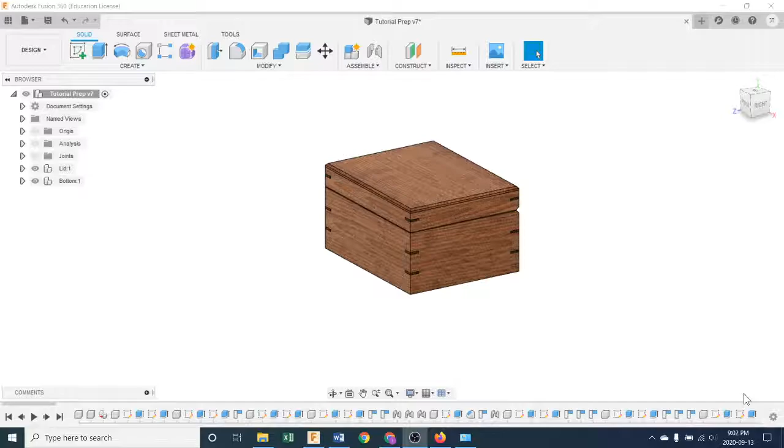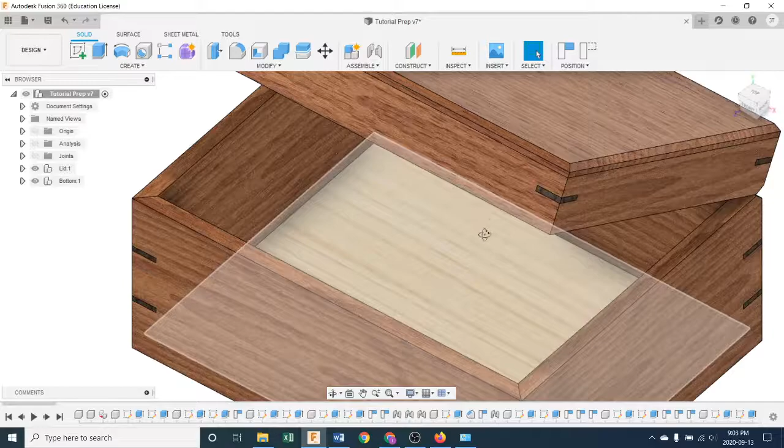What you see on the screen is hopefully the end result. This is the modeled box that I have, with the bottom, and these things called splines in the sides, which we'll talk about later. The box opens and closes, and you can see inside. Maybe you can start to see the power of being able to model something prior to building it. There's the hinges in there, that's what's making it go like this.

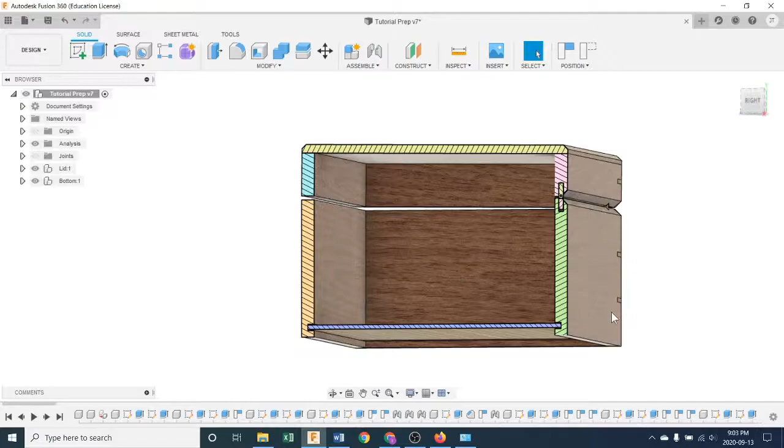If I really want to get some detail going, I can click on the analysis here, and I've got it set up so we can see inside, and we can see the hinge and how it fits into a hole. We can also see, as I zoom, this inset bottom. All these things making it pan and zoom, if you don't know how to do that, or how to orbit, you should be watching the basics video again, which precedes this one.

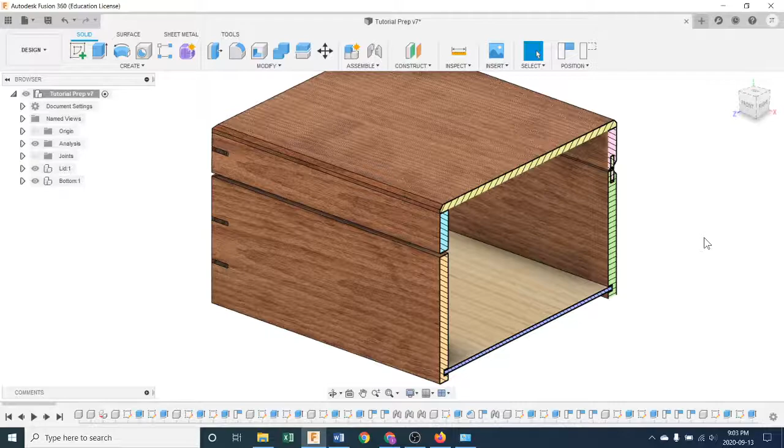Let's turn the analysis back off so we can go back to our box. To make this, and why is it called a mitered box, by the way? Well, it's all because of this joint. It's a 45-degree join, and when you join two pieces of wood at an angle, it's referred to as a miter. So we're making this mitered box.

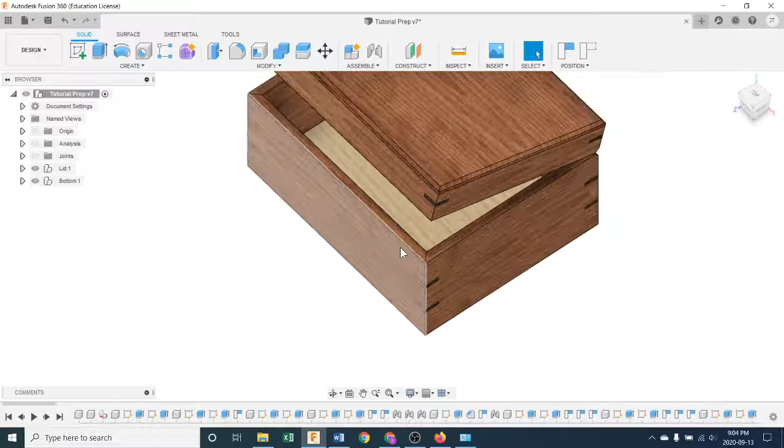So where does yours begin? Well, it begins with a lot less than this. We begin by heading up here and creating a new design. Right there, click New Design. The design is going to start you with this wonderful blank space that we're going to have to do some setup to get ready for our design.

So the first thing you want to do is save your project with a name. We'll go up here and hit save. I'm going to call this one the box, and I'm going to call it the box 2 because I just tried to record this video and I messed up, so here I am trying again. So I'm going to call mine the box 2.

Hit save. Oh, and by the way, I gave it a location, sorted out down here by this drop down arrow where you can create a new project. You might call it Woodwork 10, and then a new folder, you might call it mitered box, and then inside that folder you create all of your designs for your mitered box, which in this case is probably just going to be one design, but we'll see. We'll hit save.

Okay, notice what happened right away. The box up here changed to the box 2. That's my name for my design, and also over here it named it box 2. So you shouldn't have untitled anymore, or unnamed, or whatever it said. You should have a name for it, hopefully.

Next thing. In Fusion, we like to organize our work. It makes it easier to understand and a lot easier to work with. So part of that organization is recognizing something called components. Fusion uses components, and then you assemble those components into assemblies, join them, in various ways. So simple thing, our box has basically two components.

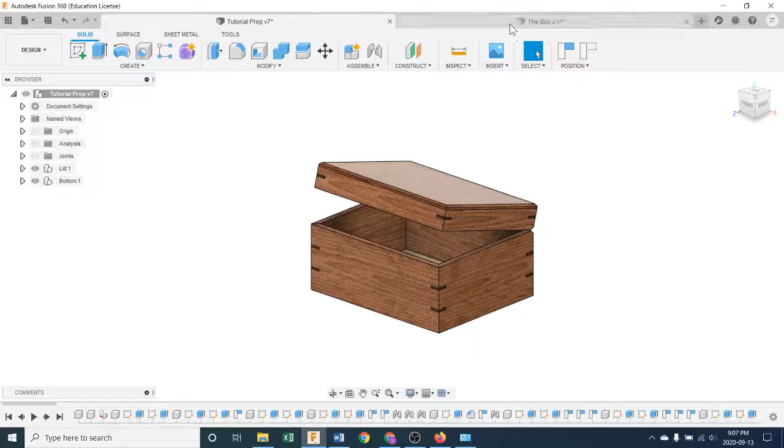Okay, so I'm going to set those up right away. I'm going to right click on the lid this time, and go New Component, and I'm going to call this one front. And believe it or not, I'm going to do it again - right click on the lid, new component, and this one is going to be called back. Name it. Back.

Then we're going to right click on the lid again, and we're going to create a new component, and we are going to call this right. And we are going to go right click on the lid again, new component, and we're going to call this left.

Okay, so we've got all these parts to our lid. I'm going to leave the top for now, but I'm just going to go front, back, right, left, and we're going to make all those pieces. This video is about the front and the back. We'll get to the right and left in a second. So how do we begin?

Well, if you notice at the end, when I hover over these things, there's these circles. That one is now on - it says activate component. This is critical. Activate component. Only one component can be active at a time. The component that's active is the one you want to draw. So I'm under the lid and I am drawing the front, so I'm going to make that one active. This is important to make sure that all of the drawing you do ends up associated with the right part of the box.

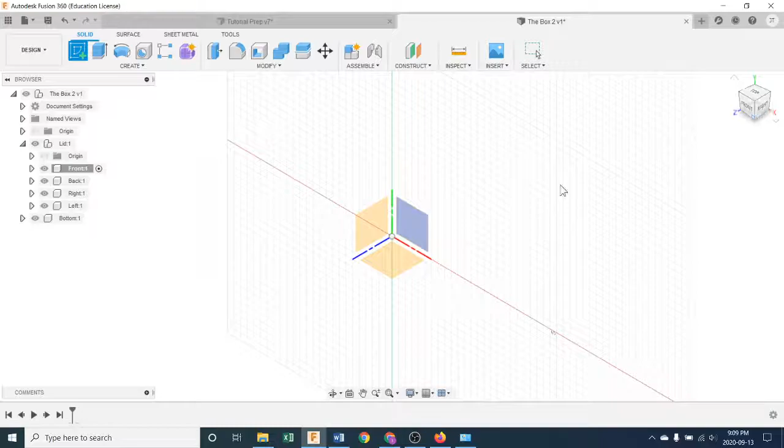First thing I want to do to draw something is head up to Create and pick Create a Sketch. Always do that. Now I'm presented with my origin. Because I'm drawing the front of the box, I'd like it to line up - remember, these two associate with each other. I'd like it to be on this panel so it lines up with front. When I click it, notice this turns to front, this view cube, and my crosshairs are straight on, and this is my origin. That's exactly what I want. If you've messed up, Control Z, back up, try again.

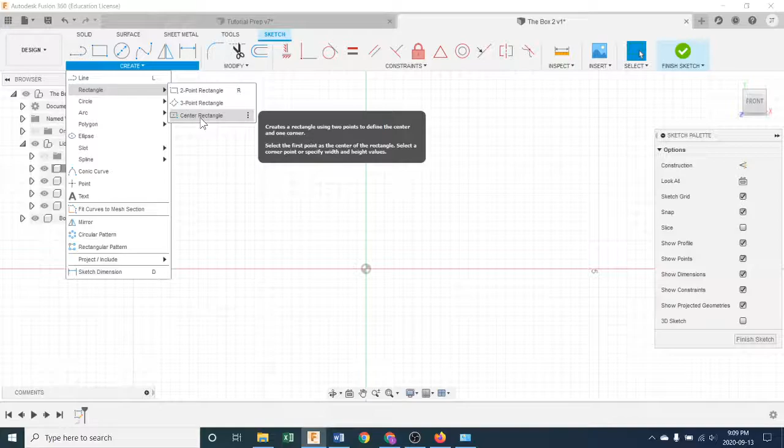Okay, head up to create, head to rectangle, head to center rectangle. There's different ways to draw everything - there's 3 choices for rectangle. Let's do center. Pick the origin center and draw it out. Don't click again, just draw it out.

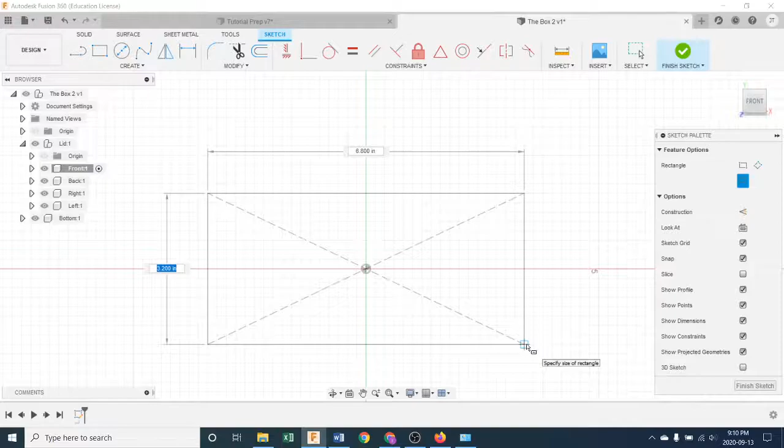Okay, this is where you get to choose the size of your box lid. So this is a custom choice, right? I mean, how big a box do I want? I don't know, so I think I'm going to make mine vertically 1.25 - see how it changed over there? Then I'll hit tab, and let's just say I screw up and I just hit enter right now. I don't want it to be 6.8 like it says, but I'll just hit enter. Boom. Oh, what do I do? Well, all I have to do is head up here to the one I don't like, double click on it, and it's editable again. So I'm going to make mine 10. Enter. Okay.

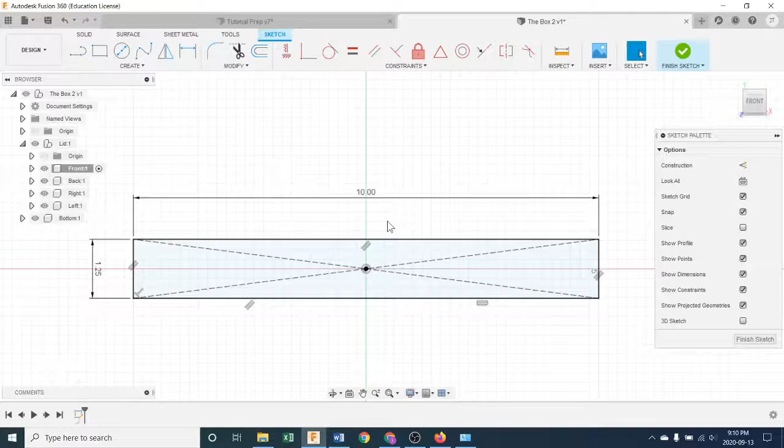I now have a rectangle that represents the front. I'd like to make it into a piece of wood with a thickness. So I click on it, push extrude, and extrude it out. The thickness of everybody's box should be 3/8 of an inch.

Now if you're working in millimeters, we'll tell you how to change that in a second. That's about 10 millimeters. So 3/8 of an inch is what I'm after here.

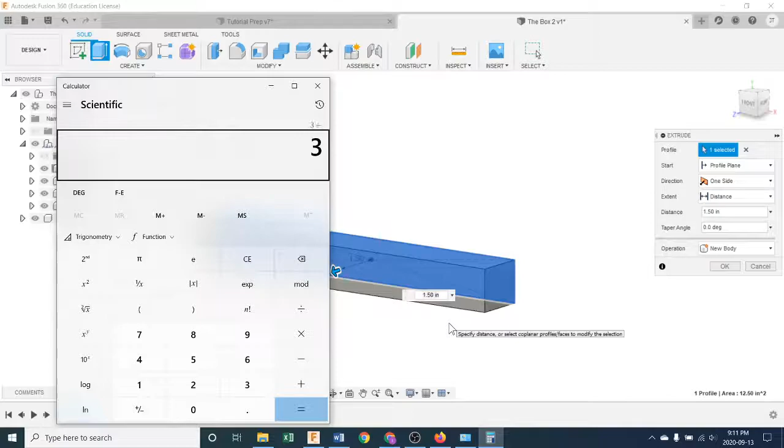So I can put that in - does anybody know what 3/8 is as a fraction? Or sorry, as a decimal? 3/8 as a fraction is 3/8. As a decimal, well, it's 3 divided by 8, right? So if you bring the calculator up, go 3 divided by 8, enter 0.375.

So you can enter by fraction or decimal. I can enter 3/8, it's quite happy to accept that. Or I could enter 0.375, and it's quite happy to accept that. Okay, a little math for you.

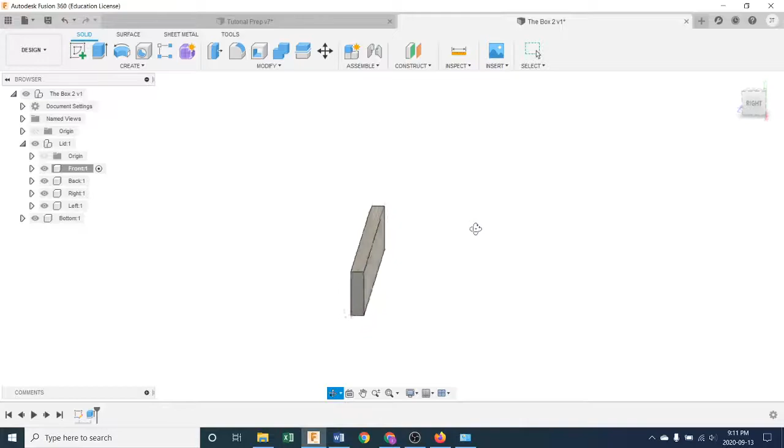Now the top of the cube we want to sort of figure out here. It's this side, right? So I'm going to draw on this surface. Remember, I'm drawing on the front, you can draw on a plane, like an origin, like this thing right there. Turn the origin on by turning this eyeball on, click. Turned it off now so you don't see it.

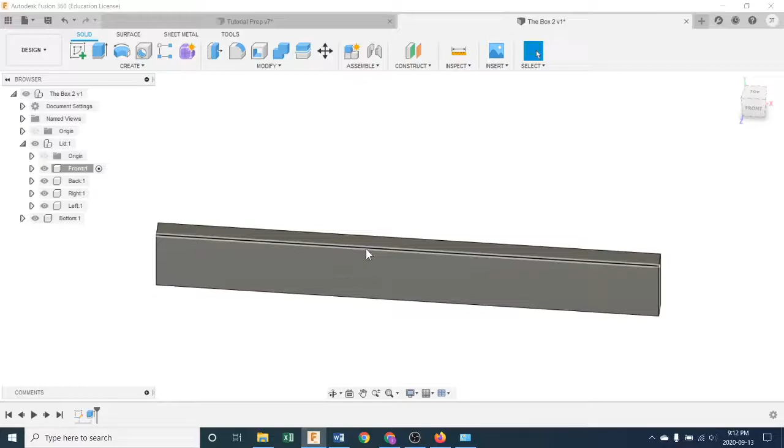Or you can sketch or draw, make a sketch on a surface of an object. Those are the only two places you can make a sketch: either on an origin or the surface of an object.

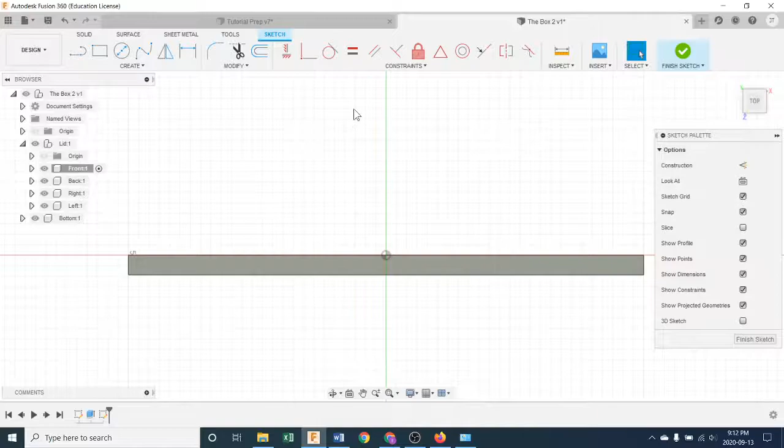So I'm going to click on this top surface and I'm going to create myself the 45s I need for the miters. So I'm going to hit line, that's one way, or L on the keyboard, like this. Draw the line out, and I would like that line to be 45.

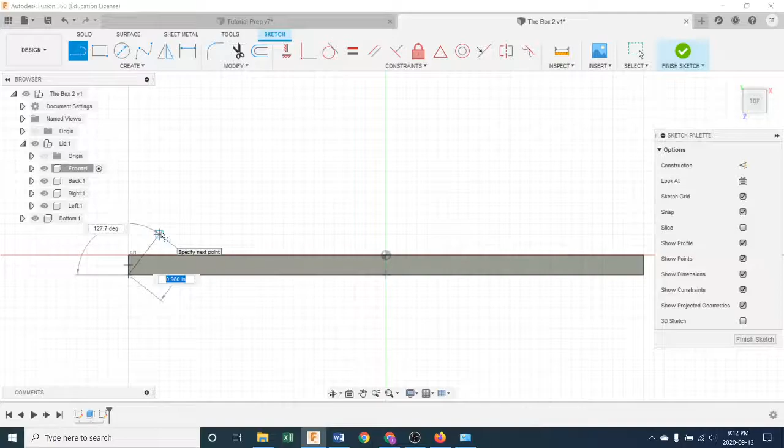So what is this if I go straight up and down? I'm reading it off the angle there. It says it's 90. What's 45 degrees more than 90? Well, it's 135. So I'll hit tab, I'll go 135, and I'll leave the line long. Enter. And then I'll head over to this side and I'll make a line.

Make sure it sticks to that corner - see that little box there? It's got to stick to that corner right there, and so it's exactly on the corner.

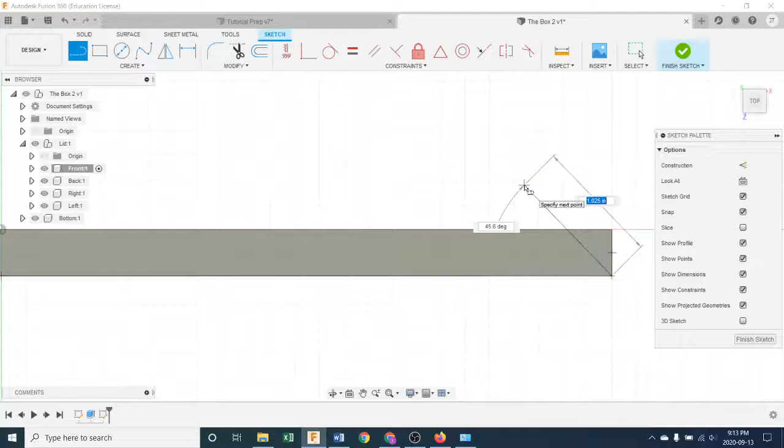And now it looks like, oh, this time I get to do exactly just 45. So I'm going to hit tab, 45, and I'm going to leave the line long because it's too hard to figure out otherwise. Okay, both those lines are there and they're 45 degrees.

I need to trim them. So up here, see the scissors? It says trim. You can hit T on your keyboard to get the same thing. If I click that, see the red line tells me what's going to happen. And then you're like, wait a minute, the line didn't go away.

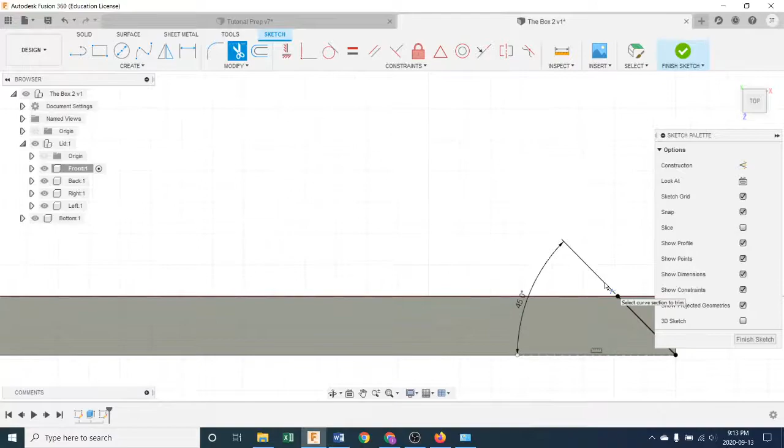Well, it did. This line that remains is simply the dimensioning line that shows me the angle. The actual line is gone. So there it's gone. Notice I still have scissors next to my cursor, so to get rid of those, hit escape on the keyboard.

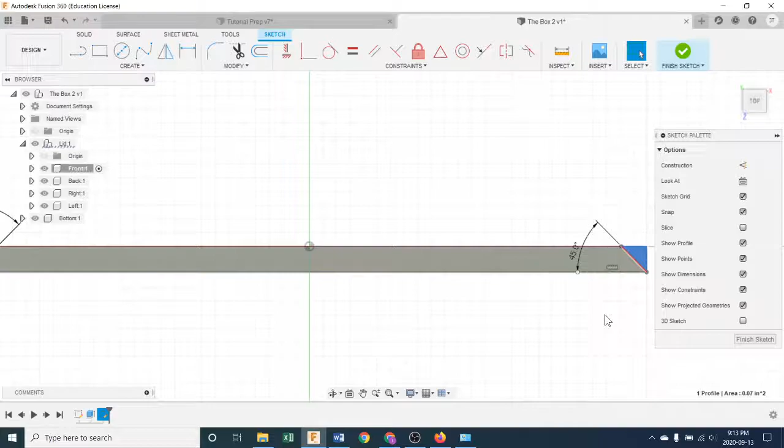Boom. Next thing, we are going to extrude this down, so we hit E. I'm going to click it, make it blue, makes it active. And now I'm going to push E for extrude. I can't see the arrow, so I'm going to orbit using my middle mouse button pressed down and my shift key.

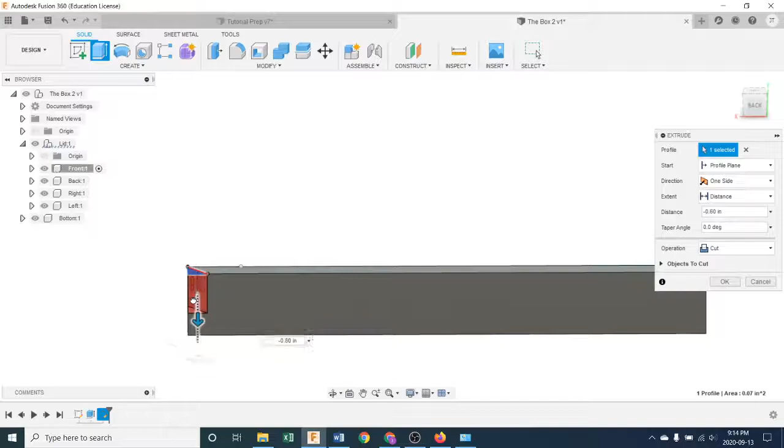And I'm going to go up, and look what happens - it makes a solid. But if I go the other way, it actually starts cutting. So that's what I want. I want to cut away that and make a 45.

What if I just do this and accept it? Well, it will work, but it will be sloppy CAD practice. I keep saying CAD, computer assisted design, right? Like this is just CAD's - it's kind of a general term for all this software we use to design things.

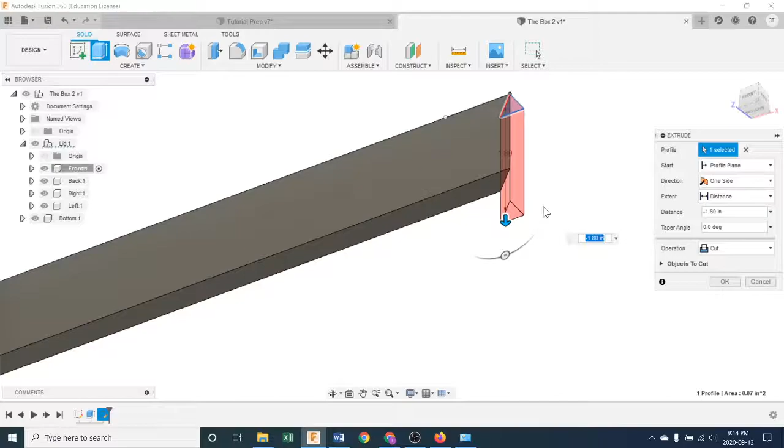What we want to do - if I put another component up, this might intersect it and chop it out or something like that because it's a cut command. So what I'm going to do is change the distance, because right now it's at a distance of, I don't know, negative 1.8. Let's go negative 4.

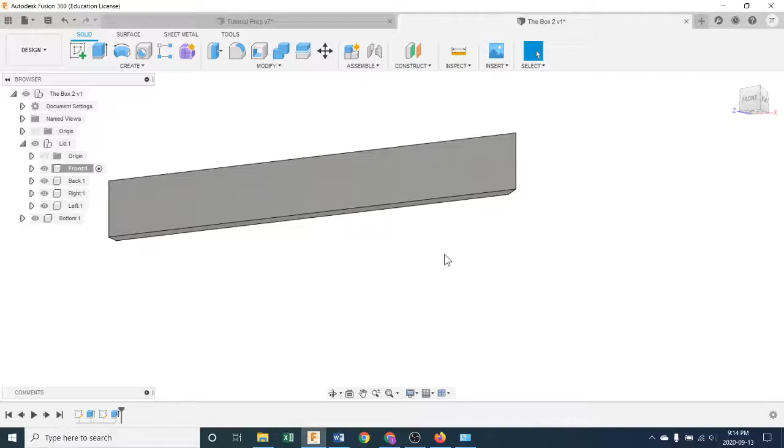Oh, I accepted it. Well, this is a good demonstration. What to do now? I could hit Control Z and back up and do it all over again, or I can recognize down here in my timeline, it's keeping track of the sketch I made, the extrusion I made, the next sketch, the 45 degree one, and the last extrusion. If I double click on that, or right click and hit edit, I'm right back where I was, so I can edit it at any time.

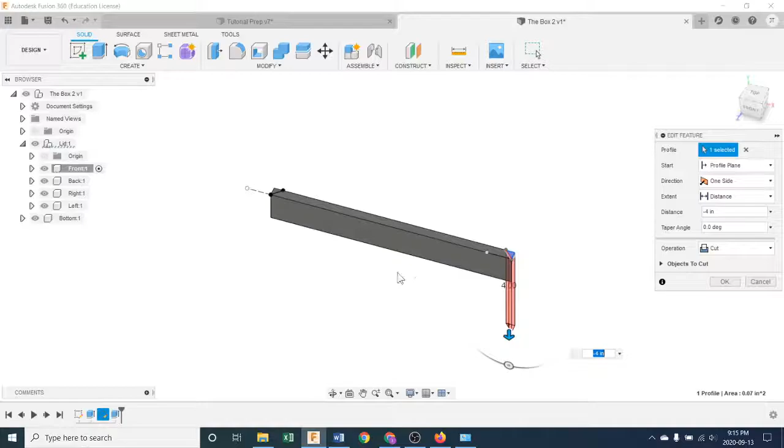And by the way, did you notice I didn't pick this corner? And I would like them both, so I better pick that one too.

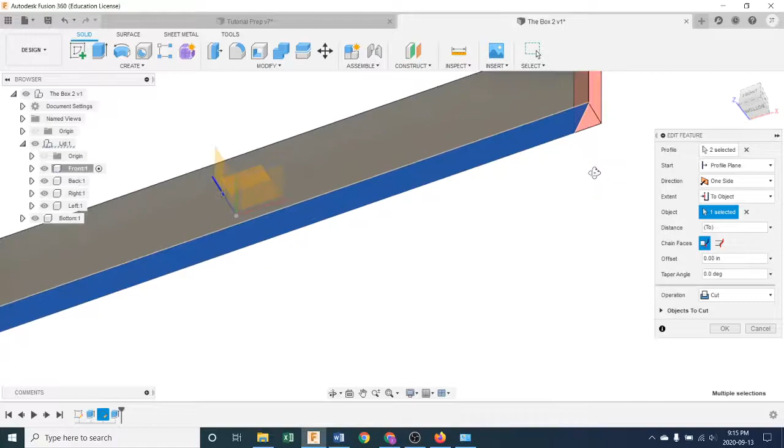Now, how do I fix the extrusion? Head up here to distance, under extent. There's another choice: hit to object, and then click the other side. It now will extrude through to the other side of this object. And if I ever change the height of this object, it will still extrude through to that other side. So that's good CAD form.

So I pushed OK, I'm good to go. I now have a front. What happens if I turn this eyeball off over here? Bonk, bonk. You can turn things on and off depending if you want to see them or not. So sometimes they're in your way, you just don't want to see them. You can make them invisible and then bring them back.

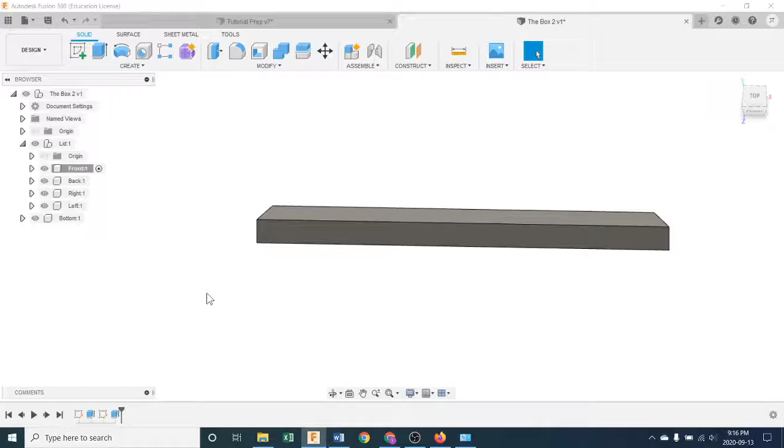Now what I'm going to do is take this front, and well, let's do it this way. I'm going to take the back by highlighting it, right click on it, and delete it. And you're like, why'd you do that? Don't you need a back? Yeah, I need a back, but why draw it? Isn't the back the exact same as the front?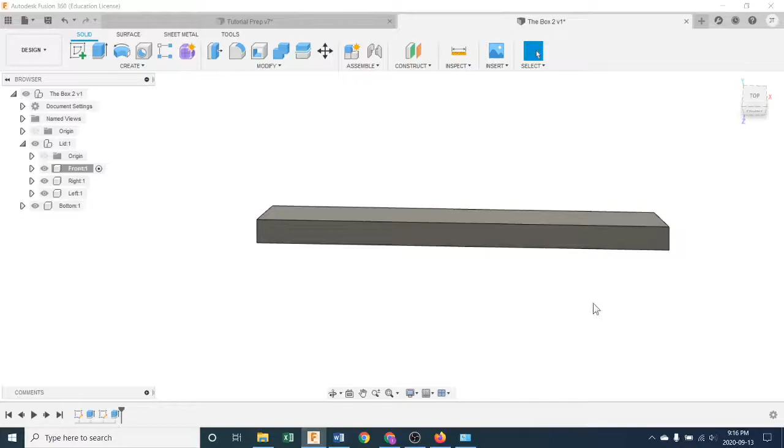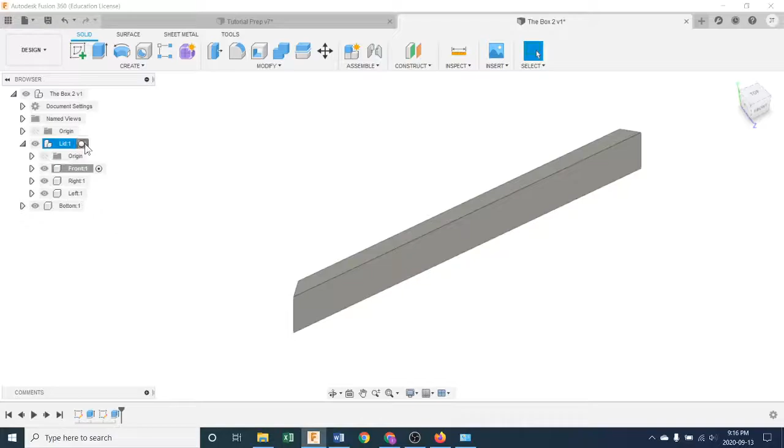Looks like it, so why not just use the front? But I'd like it to have the component name back. So what I'm going to do is right click on the front, copy it, and then click into the white space, right click, make lid active. And now we're going to right click and paste.

But don't just paste, don't do that. That's bad at this time. There's two different kinds of paste. If you paste normal, like just paste, they will be linked to one another. And what that means is if I was to suddenly put a hole in one, the hole appears in the other one, which at times is really cool. But most of the time it'll mess us up, and it'll mess us up on this project.

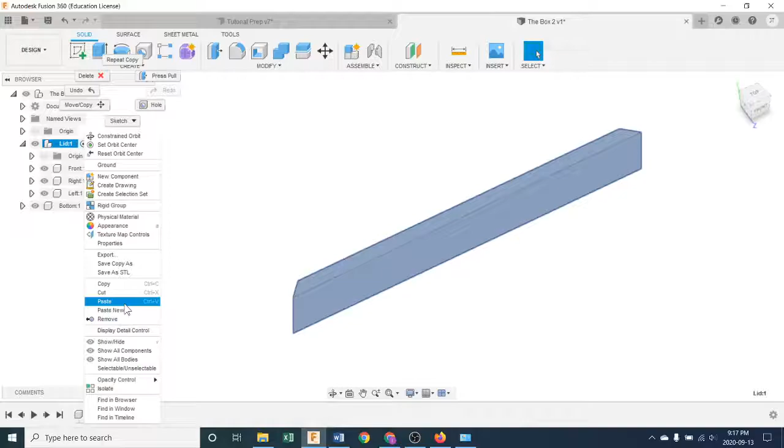So go paste new. Now when you go paste new, look what you get. You get front, right, left, front one, showing that it's a different one. Also, what's happened over here is you got this move copy, when it pastes directly on top of the other one.

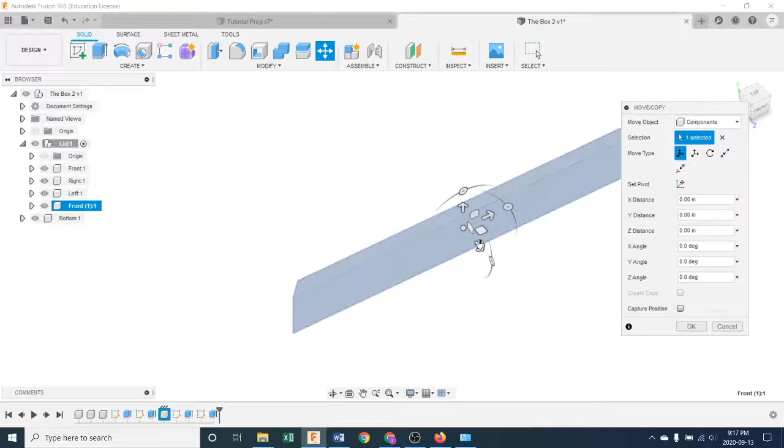So what I'm going to do is push it away using this arrow, and then use this rotate hoop to rotate it 180 degrees. And I'm going to push it away some more just so it starts to look like a box. So I just moved it. The last really important thing to do is to hit capture position. If it's ever presented as an option, just click it. It'll help to keep your sketches and your 3D bodies all together and happy for now.

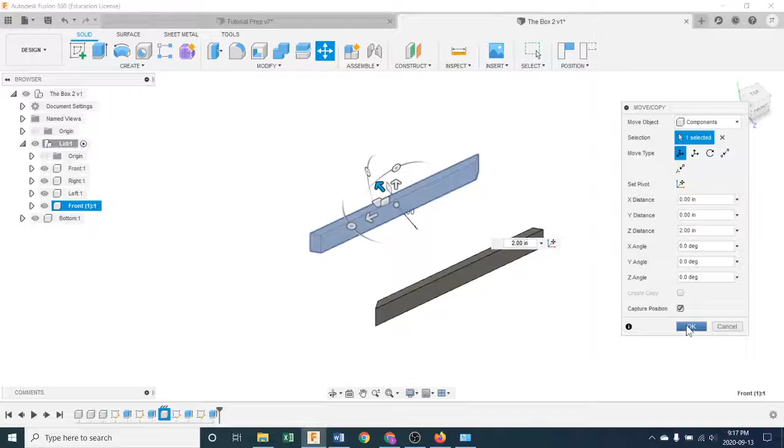Anyway, good enough explanation for now. Push OK, so I've got two things. I got this front, see how it turned blue when I clicked it? Front 1, I guess we call it. And this is front 1 here. But let's just slow click this one and call this one back.

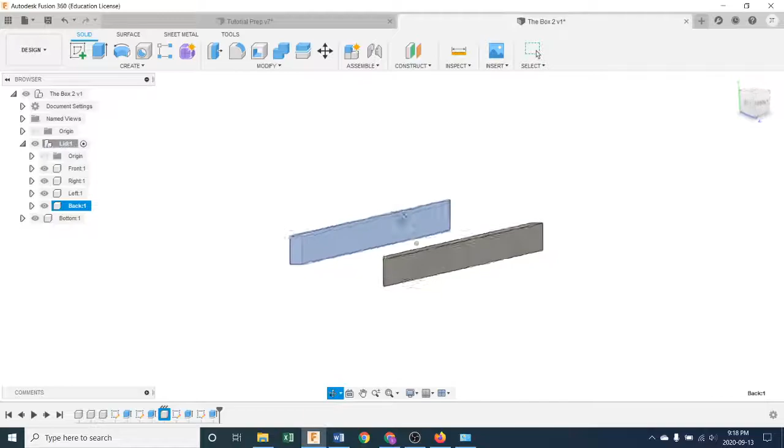Oh, look, we got front lined up with front of cube and back lined up with back of cube. Okay, well that's it for this tutorial. You now have a front and a back of your box. Your next job will be to create the left and right sides of the box the exact same way. No tutorial on that. Good luck.